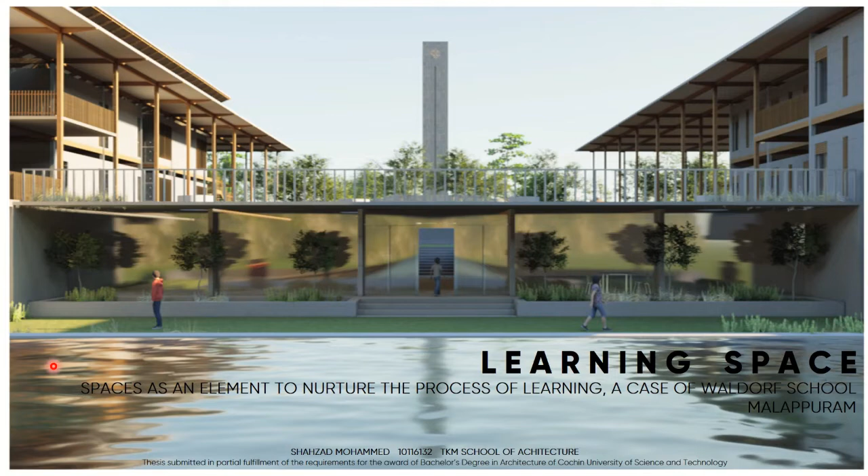My thesis topic is learning spaces as an element to nurture the process of learning. It is a case of Waldorf School located in the district of Malappuram in Kerala.

So, a learning space is more than just a present scenario school. It would have a concept of learning over teaching, or an alternative way of learning approach. There are many philosophies by different educators like Maria Montessori, Jiddu Krishnamurti, and Waldorf Philosophy by Rudolf Steiner, etc. So I have chosen Waldorf Philosophy as an aspect to design the school and its curriculum.

Due to the present schooling system with current severe conditioning and comparing between children, the passion and skills they possess are drawn away from them at a young age itself. So there are many alternative education schools coming up right now in the world, including India, to change this current system of education. And I think this alternate education is a pathway to alternate visions and possibilities.

So Kerala, though having the highest literacy rates among other states in India, has a huge scarcity when it comes to alternative schools, unlike places like Bangalore and Pondicherry. Some of the shortcomings of alternative learning schools are the adjustment issues faced by the children. Since most of the alternative schools in India are limited to pre-primary or primary school, children change their school after this age. So they face issues in adjusting to the curriculum and rigorous environment in conventional school.

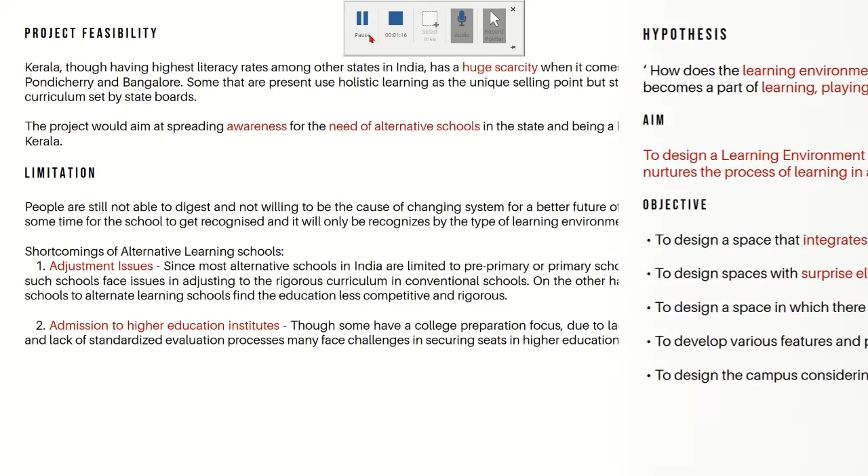So the main aim of my thesis is to design a learning environment in which both the built and unbuilt spaces and their relation to the natural surroundings nurture the process of learning in a child. The main objective is to design a space that integrates and enhances nature inside the spaces for creating a better learning experience. Then designing spaces with surprise elements, thereby developing a curious and exploratory mindset in children. Then a design with maximum interaction between teachers and students themselves. Then to develop various features and parameters responsible to encourage facilities and nurture learning processes.

So I have chosen Waldorf philosophy as an aspect to design the school. Waldorf education was created in the early 20th century by Rudolf Steiner. The central idea behind it was to create a curriculum that correlated to the development of the child as well as to educate the whole child. The main keywords in Waldorf philosophy are open planning, student-teacher relation, natural environment, co-curricular activities, experience and harmony, students as a community, etc.

I have visited a kindergarten kind of school in Kochi which is working on the Waldorf philosophy. The alternative practices they follow were circle time, choice time, small group interactions, one-on-one interaction with teachers, mixed age learning, storytelling time, etc. A brief structure of a day would be outdoor activity games. Circle time, in which students and teachers sit together and talk about the things that happened during the day and school time. Then project time, tiffin break, dance, music, or other extracurricular activities. Then basic maths, science, languages, lunch time, choice time, etc.

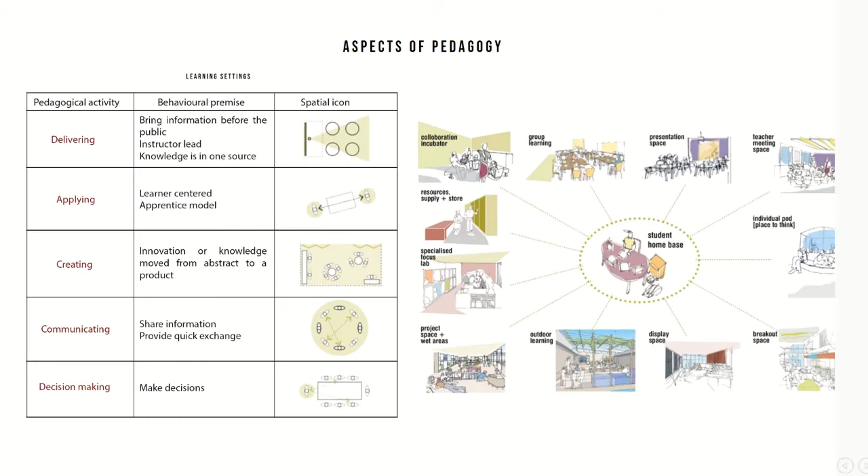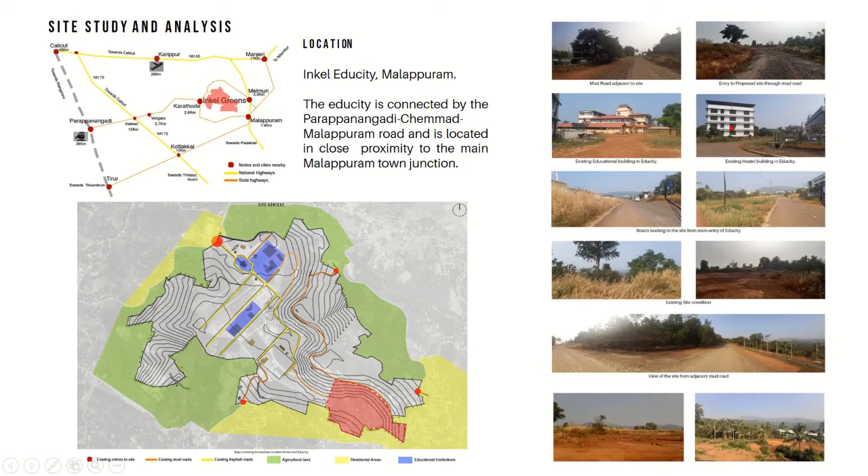And the whole site is surrounded mostly by agricultural land and residential areas. So the red area I marked is the site I have chosen for my school, and since it is the topmost point of this site, it has views towards the distant hills, as shown in these pictures, in the north and western eastern sides. And these are the existing mud roads adjacent to the site and views towards the site. So these are the existing buildings in the EduCity right now.

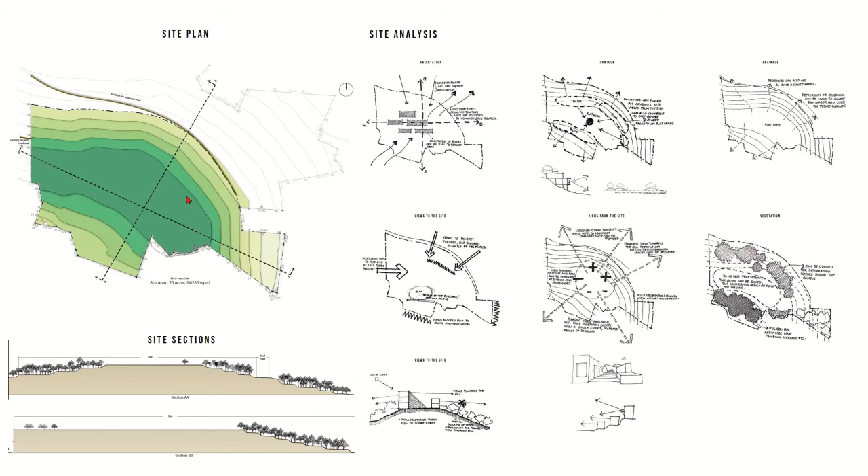So coming to the proposed site, this is the site. This is the site plan with an area of 23 acres. So it is a contour site with an interval of 3 meters. As you can see in the site sections, vegetation is more in the sloped areas than in the flat areas. Flat areas are having less or no vegetation.

So since the site is having good, pleasant views towards the north and eastern sides, academic buildings can be placed on the northern sides, and flat areas can be utilized for having playgrounds. Views from the site can be maximally utilized by having buildings with more transparency. These vegetations can be preserved in the site by having buildings raised upon stilts, so that landscape can go underneath the buildings.

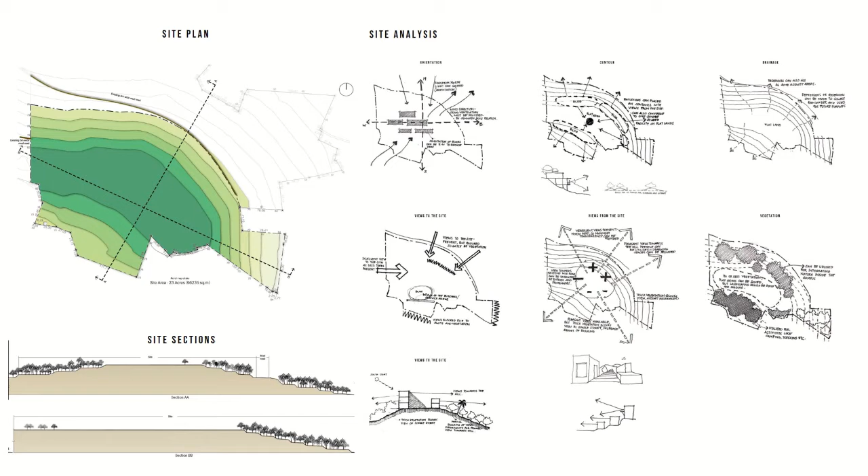So the project brief is to design a school which explores the application of Waldorf philosophy and would serve a student population of around 600 to 800 students. It shall provide education to students from 2 to 18 years of age through three major divisions: one is kindergarten, two is primary and middle section, three is secondary section.

So all these academic blocks would have classrooms of 25 children per classroom, with storage areas, learning space, and common areas. Then there would be one teacher per 25 students, and common learning spaces, outdoor learning spaces, and extracurricular activities like music, dance, workshops, etc. Shared facilities like amphitheaters, libraries, computer labs, cafeteria, stationery can be provided.

And other activities include camping grounds, small scale farming, common open spaces for gatherings and interactions, etc. And a student hostel can also be proposed for students to stay, as a residential school.

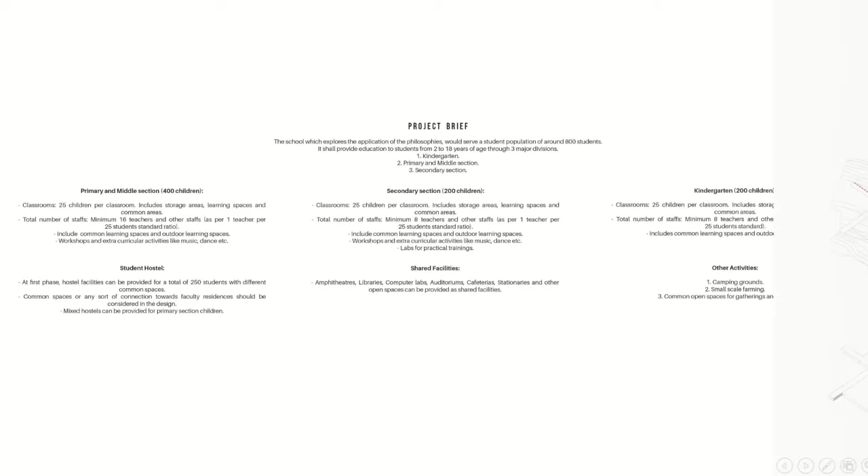So the basic ideas formed when starting to design were the framed views towards the distant hills, a landmark feature visible from all areas of the school and from outside, giving the school an identity. Then courtyards or playgrounds with an enclosure of buildings, so that it gives an enclosure for the playgrounds. Then spaces beneath the buildings as open spaces and learning spaces. Then sunken pathways or corridors, giving the spaces around them an enclosure.

So coming to zoning and massing, academic blocks are placed facing north with access to courtyards or open spaces from all sides. Hostel blocks are placed on the south side of the site as minimum users are present during the daytime, and a connection is provided to the academic block. Administration and kindergarten blocks are provided near the entry for easy entry and exit of guests.

Open spaces gradually slope down according to the site with stepped seating, and hence open spaces are provided beneath the buildings. Then pathways are sunk and the central open space slopes upward from the pathways to create an enclosure for the pathways, creating the central space as a park in between the academic and hostel blocks.

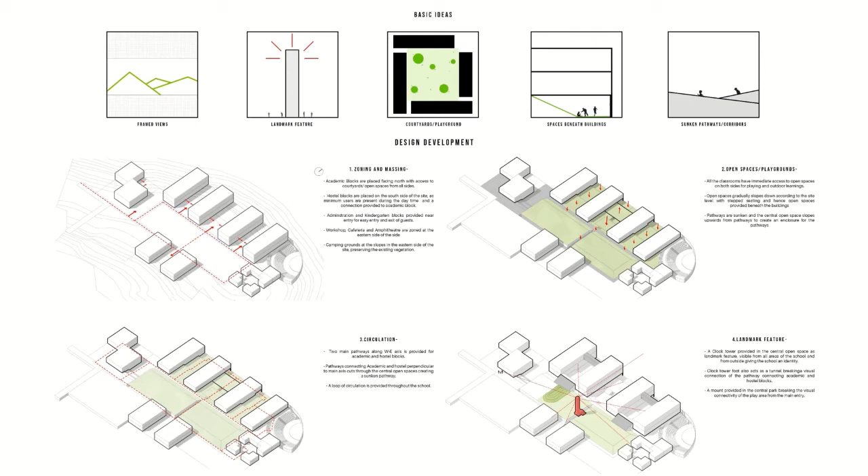Then coming to the landmark feature, a clock tower is provided as a landmark feature in the central open space, visible from all areas of the school and from outside, giving the school an identity. The clock tower foot also acts as a tunnel, breaking the visual connection of the pathway connecting academic and hostel blocks. A mound provided in the central park breaks the visual connectivity of the play area from the main entry.

Coming to the design, this is the proposed master plan of the school. The existing entry to the site is enhanced on the west side, and views are along the roads. Views towards the hills are present, and upon reaching the drop off, these views are either framed or glimpsed. The views towards the central open space are enhanced, drawing people to go there.

The kindergarten block is placed near the admin block itself, for the comfortability of parents to pick up and drop off their students.

Upon entering, the pathway becomes widened and steps downwards to the main pathway of the academic block. These are the academic blocks, and the library is placed in between them as a sunken library, with its roof acting as an open space.

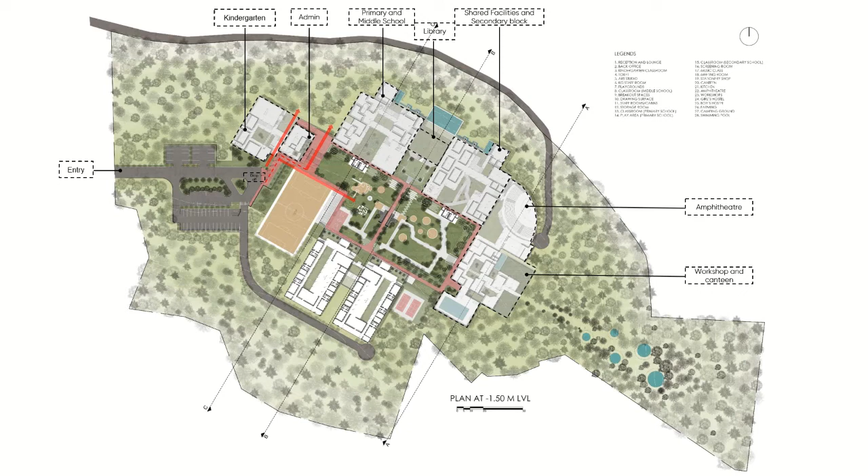These are the amphitheater, workshop, and cafeteria areas. These blocks are slightly isolated from the main entry. These are the hostel blocks, and these are the central park. I would rather explain the design through isometric drawings.

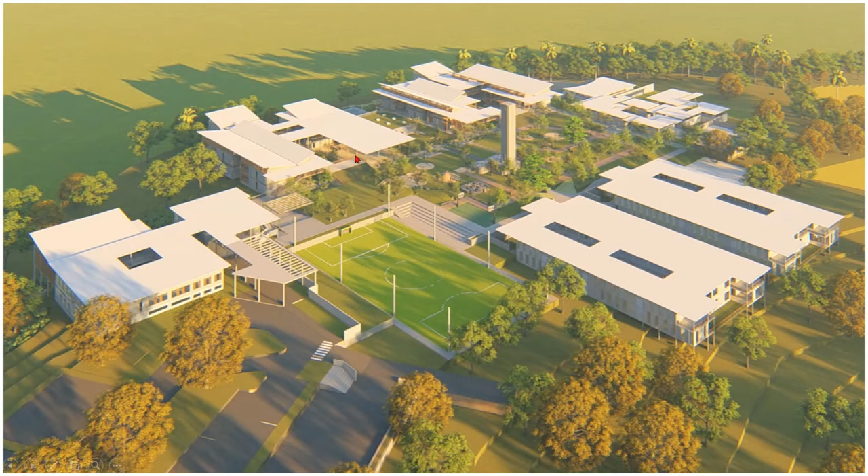On the screen you can see the overall bird's eye view of the school. The entrance is through this pergola space leading to the admin block, and right adjacent to it is the kindergarten block with courtyards in the center. These are the four academic blocks, adjacent to the cafeteria and workshop space. On the south side, you can see the ladies and gents hostel.

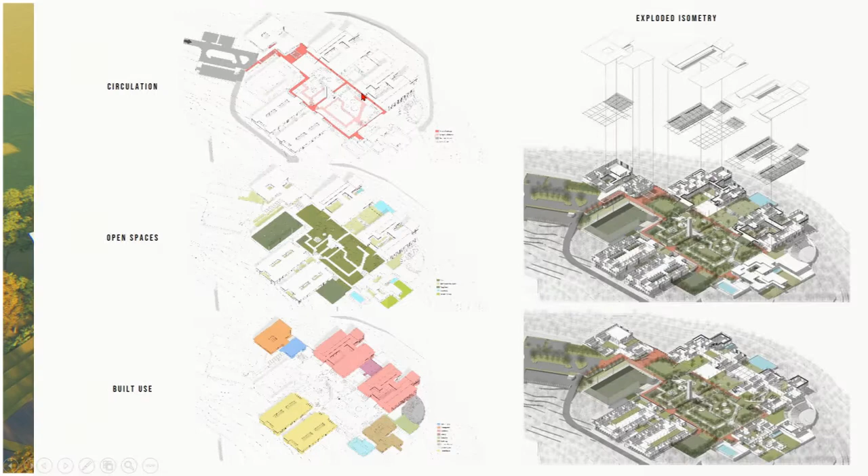Looking at these diagrams, you can see the circulation diagram. There are mainly two types of circulation axes: an east-to-west axis and a north-to-south axis. The main axis is the east-west axis, which is the academic pathway and the hostel pathway. Connecting these is the north-south axis, and the pathway connecting the academic and hostel areas breaks the central park into two parts.

Talking about the open spaces, you can see two different colors of green depicting different types of open spaces. The dark green areas represent playgrounds such as football fields and badminton courts. The green in the center represents the central park of the school, and the green behind the workshop block represents the organic farming areas. The light green represents open spaces or courtyards for learning and interaction between school blocks.

Looking at the built-use plan, the orange and blue represent the kindergarten and admin blocks respectively near the entry. Red blocks represent the academic blocks, violet is the library, gray is the amphitheater, green is the cafeteria, brown is the workshops, and blue is the swimming pool. The yellow represents the hostel blocks on the south side.

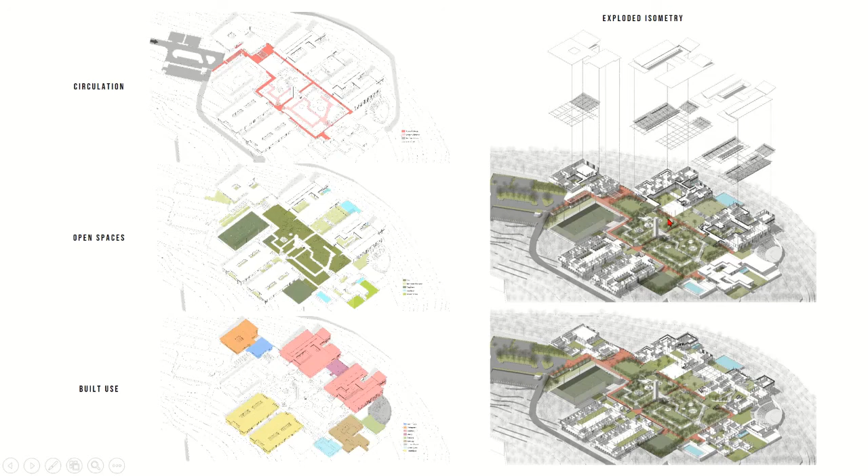This is the exploded isometry of the whole school block.

On the screen you can see the ground floor isometry. This is the main pathway with the pergola, as seen in the view, connecting to the kindergarten block, the academic block, and the main entry. Going through the kindergarten block, it steps down 1.5 meters below the ground, and all the classrooms are placed on that level.

There is an open, indoor play area for the kindergarten, shared between the ground floor and the first floor, with a courtyard in between. The playground of the kindergarten further steps down 1 meter from the minus 1.5 meter level, and is connected to the academic block through a ramp.

Entering through the admin block, there is a reception, a back office, and a lounge area with framed views towards the hills and also views towards the central park area.

Entering through the main entry, there is a visual connectivity which is broken by mounds present in the park, which also create an enclosure for the park, with playing areas on them.

The main pathway steps down 1.5 meters and reaches the academic block. The main pathway of the academic block is sunken minus 1.5 meters from the central park area, connected through a sloping landscape with stepped seating for interaction and learning purposes.

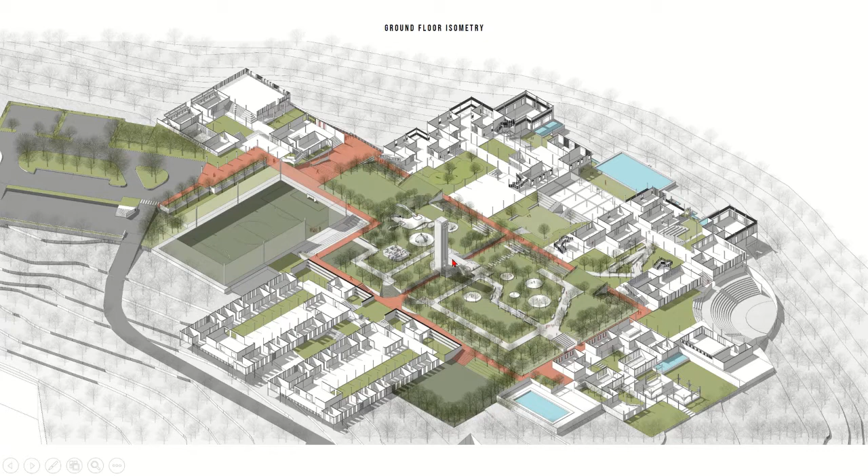The academic and hostel blocks are connected by sunken pathways through the clock tower, which also breaks the visual connectivity from the academic block to the hostel.

So this is the first floor isometry of the building, and as we said earlier, these are the toilet blocks, whose roofs connect to the first floor of the academic blocks.

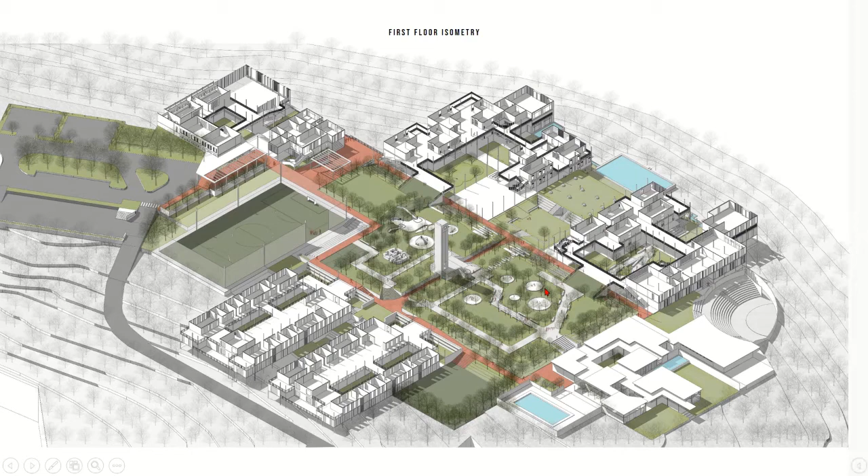Looking at the academic block, the basic design consideration was to have courtyards or open spaces accessible from all the classrooms, with immediate access right outside the classrooms. As you can see, the middle school and primary school share courtyards or open spaces between them, with immediate access from the classrooms.

Between the classrooms we have breakout spaces and display spaces for interaction and collaboration. As considered according to the pedagogical aspects of Waldorf philosophy, this is the art studio.

For the primary school, there is an indoor play area in between all the classrooms. And this is the central kund area and the roof of the library, acting as an open space for students from both blocks.

The open space between the higher secondary block and the common amenities is more of an interactive space with seating for elder students in higher secondary and secondary schools.

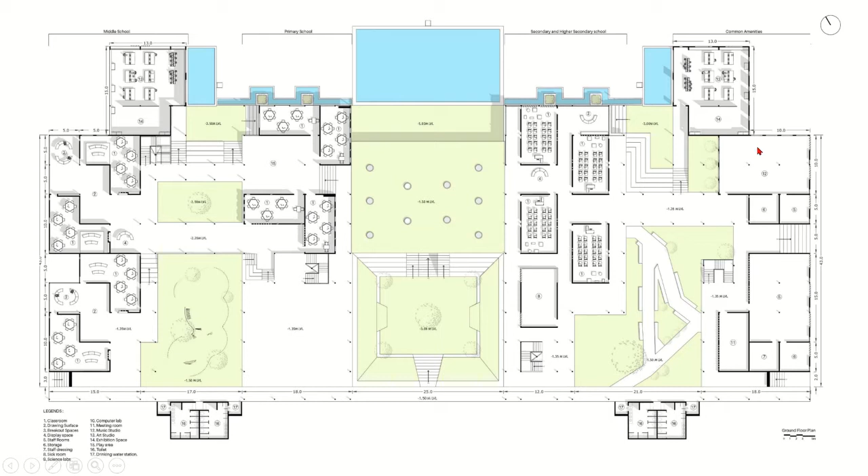The spaces between the classrooms of higher secondary are similar, with breakout spaces and display spaces for interaction and presentation. These are the staff room areas, music studio, and art studios for the blocks.

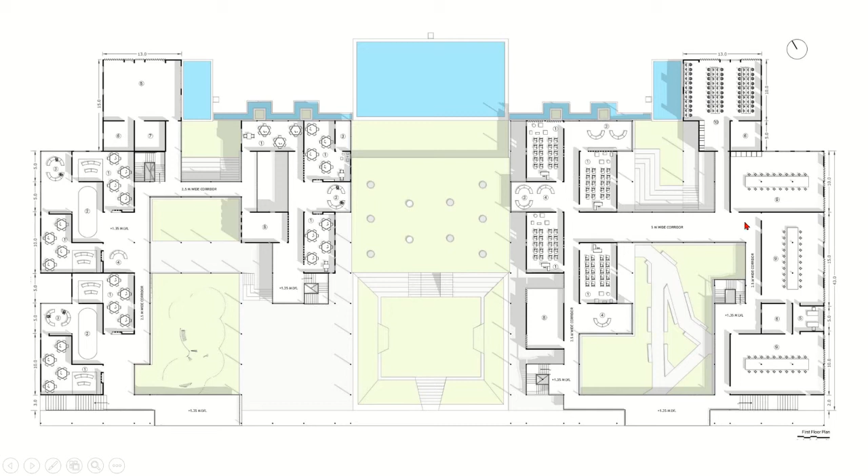So this is the first floor plan of the academic block, with bridges connecting both blocks, and balcony-like spaces which are breakout spaces with views protruding outside the classrooms. There are bridges connecting the pathway between the blocks.

So this is the north side elevation, and as you can see when zooming in, there are activities happening right under the buildings, with interactions and learning happening.

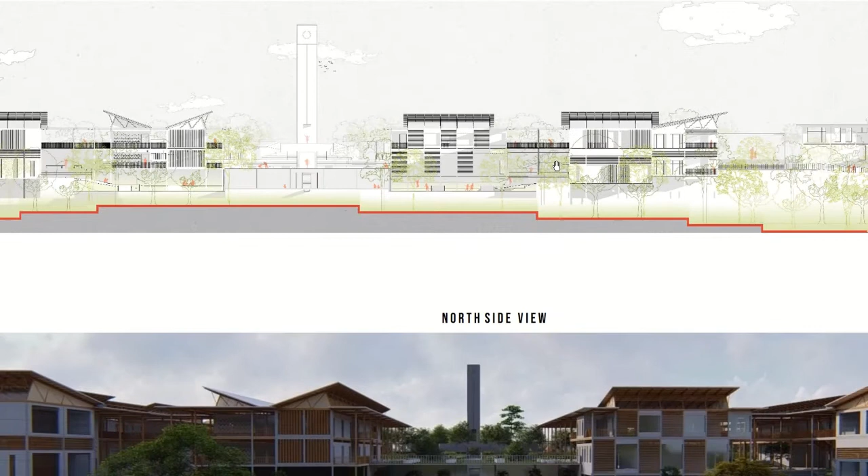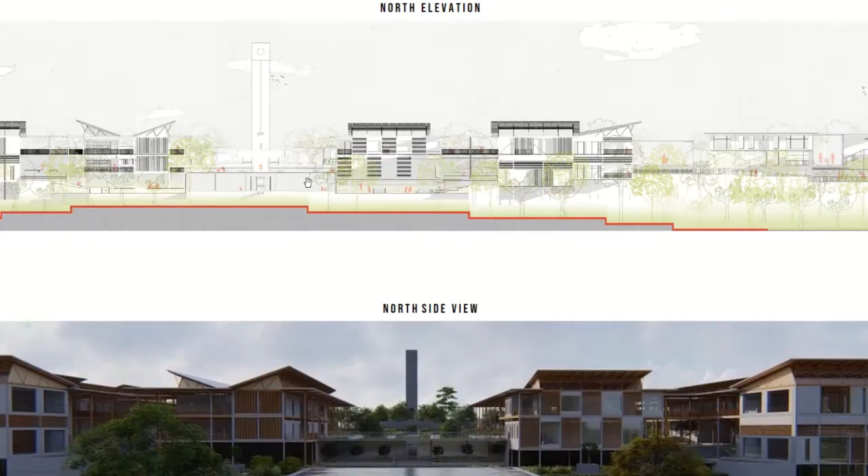This is the library block with access as a sunken space, and children playing under the building. The landscape comes down and goes through the building, and again goes through the library to the areas above. This is one of the rendered views of the north side elevation.

As you can see, this is the section through the academic block. As we said, this is the toilet block, whose roof connects between the park and the first floor of the building.

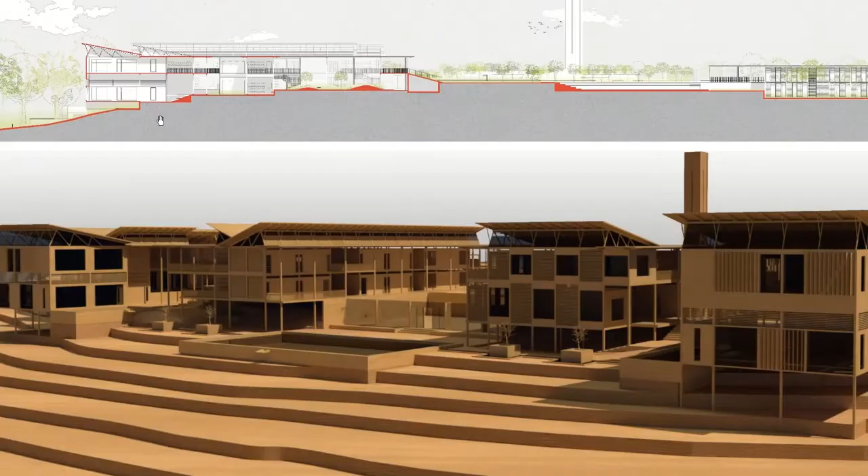This is the mound space for playing between the primary school blocks, and the landscape further goes downward. These are the landmark features, the clock tower and a water tank.

So talking about the kindergarten block, the basic plan is such that there is a courtyard in the middle and a playground space which steps down and is open to views towards the north side. When entering, this is the main entry of the kindergarten block through the pergola space.

It is like stepping down minus 1.5 meter level. These are the classrooms, and this is the reading or library room, and these are the rooms for staff. This is the courtyard in the center, and this is the mezzanine floor, which again rises 1.5 meters above, acting as a mezzanine play area for the first floor and ground floor of the kindergarten block.

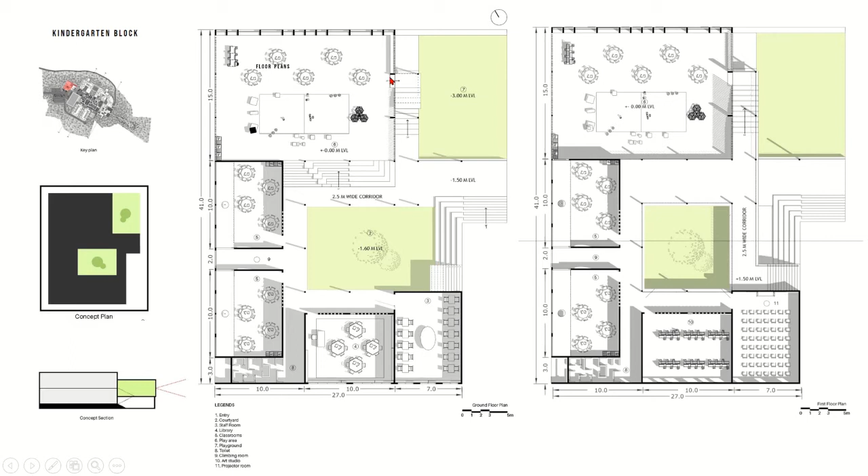The connection to the kindergarten block first floor is through the main entry level, as this is the step connecting the first floor, and there is also a step connecting through the play area, that is the mezzanine floor play area, as you can see in the isometry.

These steps connect to the first floor from the entry. This is the entry. These steps connect to the first floor, and also these steps from the first floor connect to the mezzanine play area in the ground.

You can see the roofs of the kindergarten blocks as a sloping roof, so that the play area gains more north light and ventilation. This is an axonometric model view of the kindergarten block.

This is a rendered view of the court. This is the playground area, and this is the common mezzanine play area.

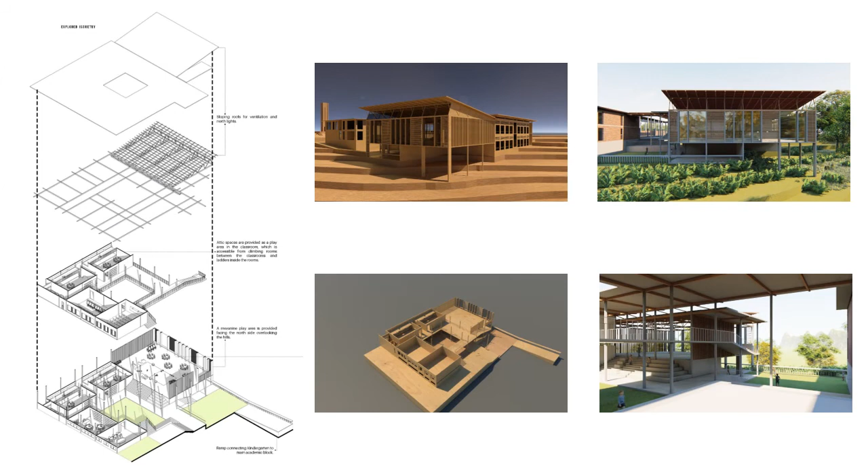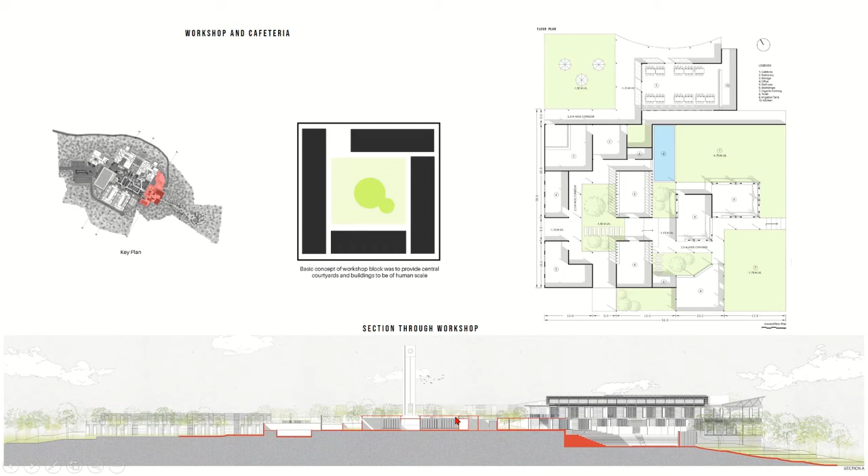There is a service area into the storage area of the workshop and stationery block, which is basically a storage space for stationery and workshop blocks. This is the section through the workshop block, through the amphitheater, workshop blocks, and the swimming pool.

These are the service areas as said. The service corridor leads to the kitchen area, the service courtyard behind the stationery and workshop storage space. This is the cafeteria block with dining in the balconies, also with views towards the amphitheater stage.

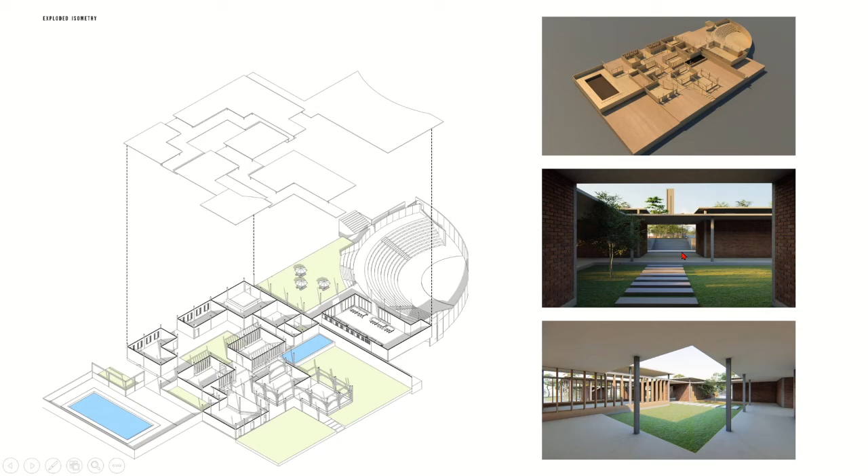So these are the views of the workshop block, and the workshop blocks would be having views towards the landmark feature, the clock tower, from inside the workshop block. So these are the views of the workshop blocks.

When starting to design, the library was zoned in between both age groups of academic blocks, so it would be easily accessible for both to access the library. But when designing the academic blocks, the basic thing was to have a connection to the courtyards immediately from the classrooms. So considering both aspects, and since the site has slopes, the library was sunken into the ground, and the roof was made into an open space, meeting both needs.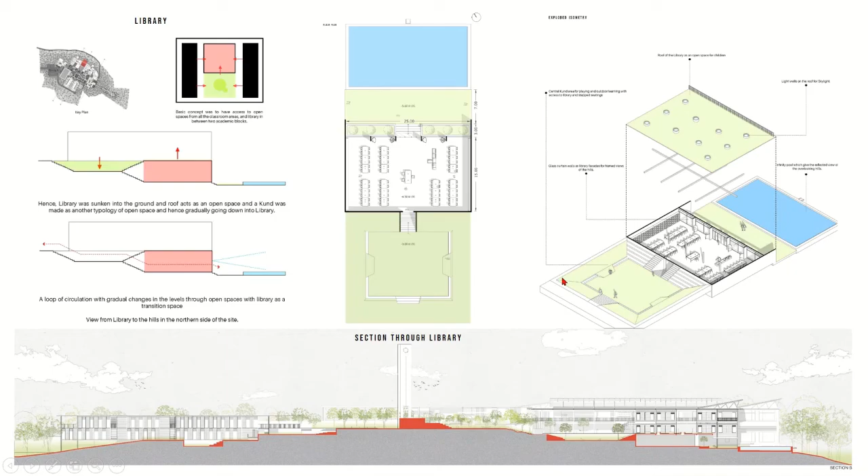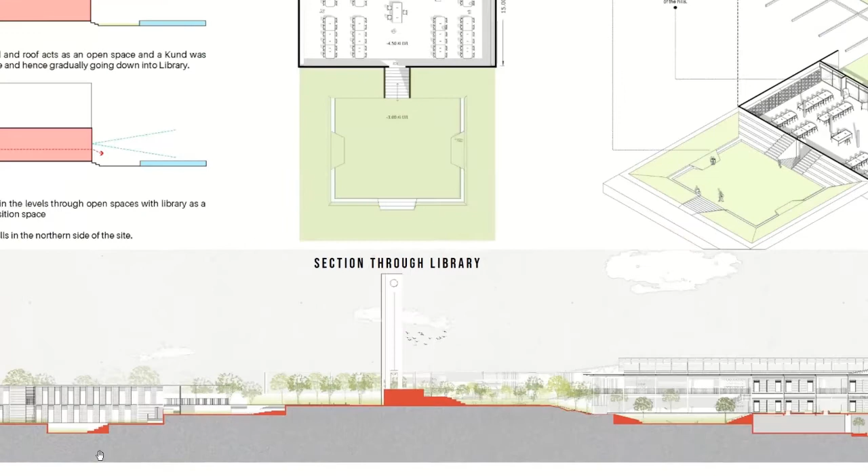This is the library, and these are the skylights for light. This is the kund which gradually steps up towards the pathways, which has a sloping connection to the park areas. The platform of the water tank acts as the bridge between both parts of the park, and these are the kund spaces, or interaction spaces, between the library and the hostel blocks.

So my special topic is about transforming school open spaces into learning spaces. Basically, the primary concern of designing a school is more than designing a classroom; it's more about designing the spaces outside the classroom. Learning happens outside the classrooms, so I have given more importance to the spaces outside the classrooms.

When discussing learning landscapes, according to studies, a schoolyard that has been transformed into a learning landscape articulates space, culture, and the children's view such that it promotes physical, socio-emotional and cognitive learning in children. As you can see in the picture of Shreyas School, Ahmedabad, there is a water pool which also acts as a learning space for children. It has a world map on it, and each child is standing on a continent.

This type of learning right now happens inside the classrooms. If we design spaces with such approaches, these types of learning can be taken outside and taught to children in a much more graspable way. Many schools are right now adapting to outdoor classroom methodologies.

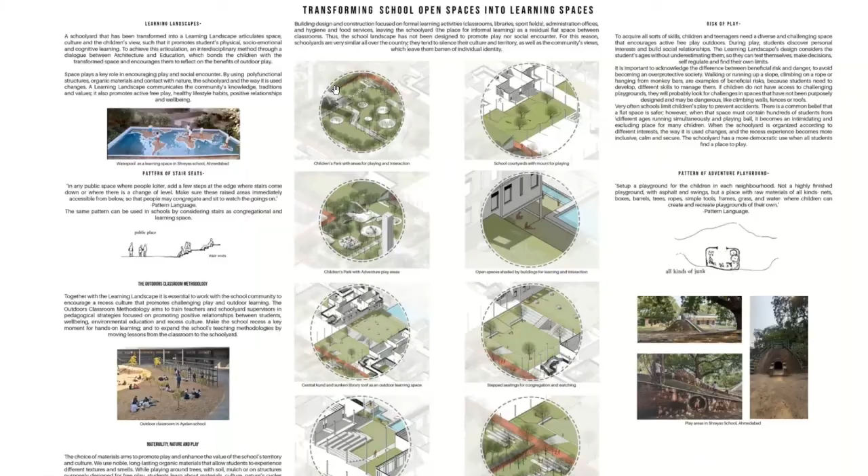In my design, I have given various types of spaces so that learning happens outside the classrooms. Considering the risk of play, there are parks with small sand pits where children can build their own things, and learning happens on the sand pits by drawing on them and building something out of them. There are mount spaces on which students can climb, and adventurous playgrounds on which students can test themselves and take up challenges of different skill sets.

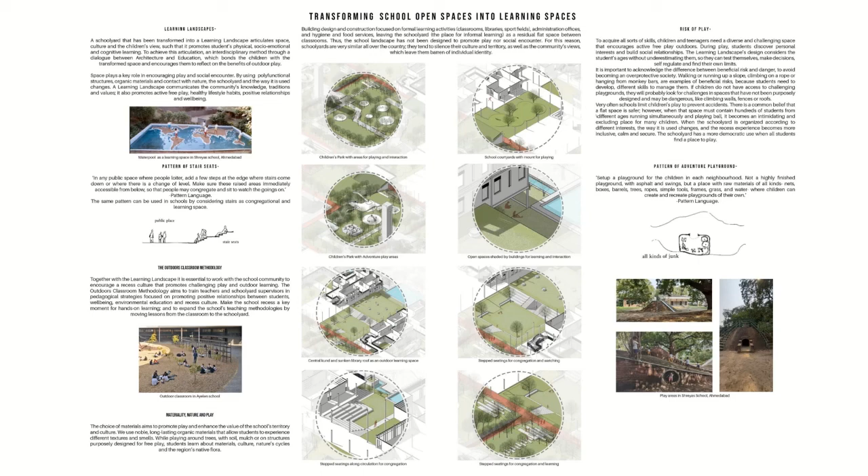There are spaces beneath the buildings for individual contemplation. There are kunds for social interaction, if there are small interactive programs happening. There are stepped seatings, as we can see. It is said in A Pattern Language that in any public spaces where people loiter, we should add some steps to make it more interactive and more of a social space. So stepped seatings are provided in parks and landscapes.

Talking about the pedagogical response in design, as we discussed in the first stage, there are different pedagogical aspects based on the Waldorf philosophy to be considered while designing the interiors or classroom spaces: breakout spaces, display spaces, individual pods, group discussion, project areas, collaboration incubators, outdoor learning spaces, etc. I have provided these kinds of spaces inside the classrooms, and as semi-open spaces also.

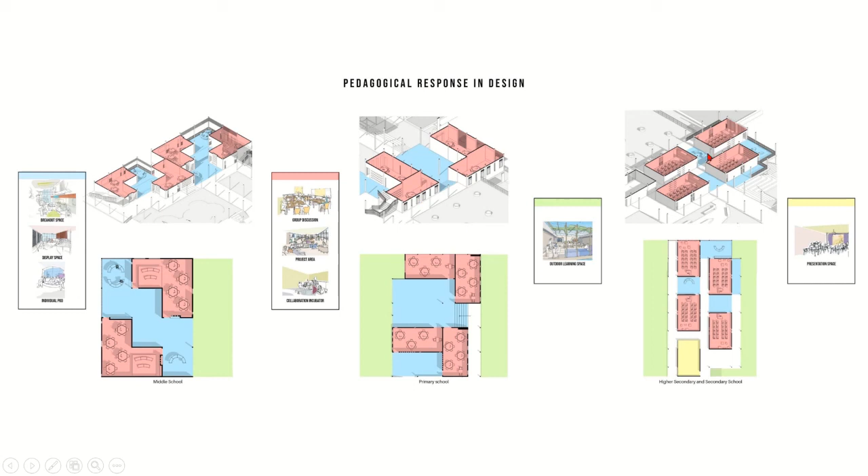The blue spaces represent the breakout spaces and display spaces, and the red spaces represent group discussion spaces, project areas, and collaboration incubators, which happen inside the classrooms. In the case of middle school, it happens in this manner. This is the case of the primary school, and this is the case of the higher secondary and secondary schools. So basically, that was my school design.